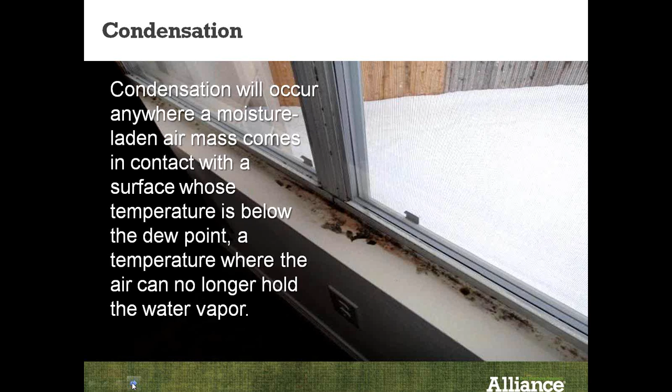The reason I put this up is we've seen the window industry change some of the performance criteria to having a condensation resistance index. So I'm wondering, should manufacturers of insulation materials create a condensation index for their insulation materials in wall assemblies? That may be a stretch, but it's something we should all be thinking about. So the focus of this presentation is to try to understand the facts of condensation. If we keep the temperature of these building materials above the dew point, condensation will not occur.

Obviously, the dew point temperature in the interior environment is very dependent on the environment that the occupants create in the home. If the occupants live in the home, and they're in the home throughout most of the day, they cook a lot. If the home is fairly new and there's building materials that are still drying out, well, the dew point in that home environment will be a lot higher, which means that the building material temperatures have to be a lot higher also. So that's a main fact that I sort of want to focus on.

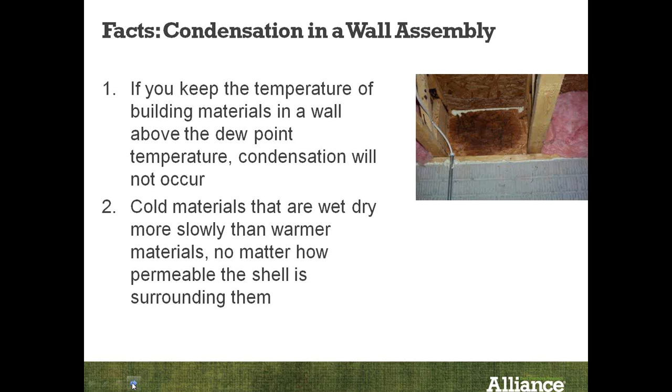But the other fact is cold materials, when they do get wet, they stay wet for a long period of time. And so an example I always like to use when I talk to builders is if you look at your driveway in the wintertime and you have a pool of water, a puddle, it takes a lot longer for that puddle to dry out because it's cold outside and the surface temperature of that driveway is cold. If you have that same amount of water and puddle in the summertime, it dries out fairly quickly. So sort of the same concept. And I'm trying to keep this as simple as possible, and that's our whole goal of this presentation here.

Third fact is when you have air movement in wall assemblies, air tends to bring a lot of water vapor into that wall assembly through diffusion or through holes. And fourth, when water vapor moves across assemblies or through environments, it's not really dependent on temperature, it's really dependent on concentration. So a mass of air that has high vapor is going to want to move to a lower concentration of air or surface. So those are the 4 key points that I want to make as facts in regards to condensation in wall assemblies.

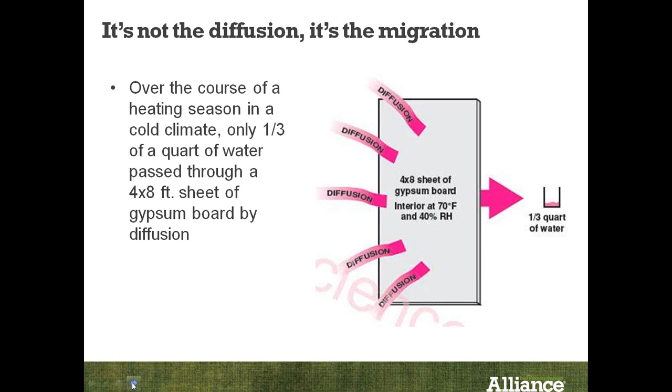But just to talk about diffusion, obviously I would say 99% of our walls are sheathed with gypsum wallboard. And gypsum wallboard is not a vapor barrier. It allows vapor to diffuse through the product. And you can see here, a third quart of water passes through a 4x8 sheet. This is fairly well known in the building science arena, but I'm just trying to let you know that water vapor does pass through building materials. Now, if we have a 6 mil polyethylene sheet, it's considered a vapor barrier, so we will not see a lot of vapor pass through those types of materials.

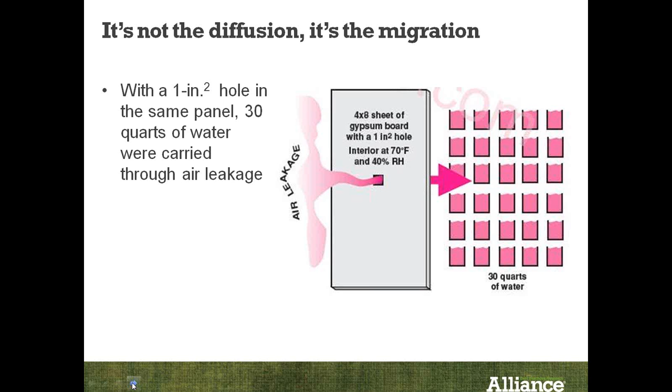But in a drywall sheathed wall, if there is a hole, and there are many holes like electrical outlets or plumbing penetrations, that hole and air leakage will bring a lot more water into that wall cavity. And in those cavities, it's more prone for condensation to occur because now the vapor that's passing through that hole is looking for a really cold surface to condense on. If it doesn't see a cold surface to condense on, it's not going to condense, basically.

So let's focus on temperature. Temperature, I think, is what architects, engineers, builders, building science need to strive to understand. I think that simple concept will ensure that building assemblies will be more durable. I think through the works of building scientists and others in the industry trying to help builders or architects and engineers understand performance of wall assemblies, we're starting to add other characteristics, like vapor diffusion through wall assemblies, looking at different building materials, looking at hygrothermal analysis models, and all that is great, but I think we need to try to understand temperature. If we look at some old building science books from the 50s and 60s, they really focused on temperature as trying to control the interior cavity environment.

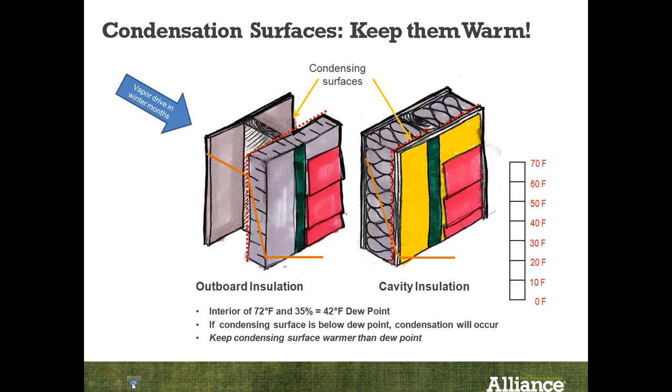When you have insulation that's within the cavity, now we have thermal bridging occurring, but we also have interior cavity temperatures that are lower than the dew point temperature in the home, which means if vapor or air leakage occurs behind the drywall, there are surface temperatures for condensation to occur. So keeping surfaces warm in the cavity is the key here.

So lastly, if I look at the last 70, 80 years, Owens Corning brought in their fiberglass batt in 1938, which is a vapor permeable product and a very good insulator. Some of the downfalls with vapor permeable insulation is it creates a bit more potential and risk when we talk about condensation in higher performing wall assemblies. Vapor permeable insulation allows air leakage to occur if there's no vapor barrier or air or vapor retarder behind the drywall, and allows for potentially cooling off condensing planes.

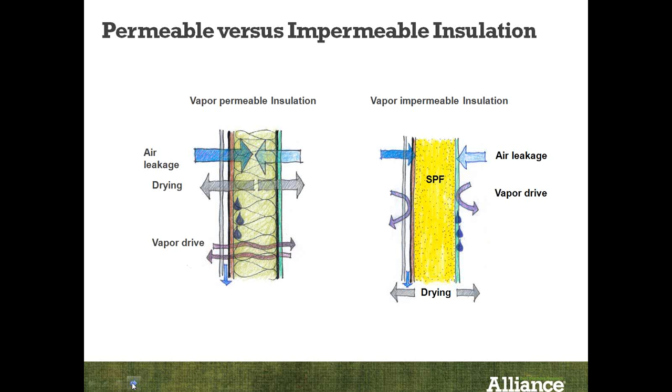It's a vapor control layer, it's predominantly an insulation thermal control layer, and it could be an air control layer. So it brings a lot of benefits and takes a lot of headaches out for builders, architects and engineers, because it is a complex wall assembly, and doing it right the first time makes a lot more sense.

So I just wanted to go through some pictures and projects that I've worked on over the last 15 years and show you some typical examples of what I've seen in the field. These examples are new homes that have been built, and these are basement scenarios. Condensation is more predominant in heating dominant climates, so climate zones 4, 5, 6, 7. This one is a concrete foundation wall, and we're seeing a lot of condensation, and in those corners we're actually seeing frost because it was so cold.

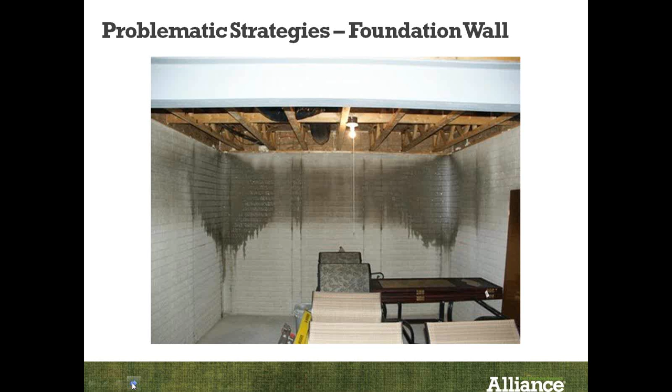This foundation was actually insulated outside, but only below grade. So the above-grade area, about 14, 15 inches, was exposed, and it caused condensation to occur. Why did it occur? The main reason is the interior surface temperature in those corners was below the dew point temperature in the home. The other aspect I want to talk about: in new construction, especially basements, we introduce a lot of moisture during the first 18 months of the home's life. Because concrete has a lot of water in it, it raises the interior relative humidity inside the basement and ultimately the whole house.

The other area we see a lot is insulation applied to band joist areas, where typically they're insulated, but we're allowing the moisture-laden air to get in contact with a cold surface. In the bottom left, we're seeing an OSB band area. That band area was insulated, but covered with fiberglass batts stuffed between these open web joists. It was meeting the R-value of that climate zone, but the fiberglass batt actually cooled off that OSB insulated band surface to below the dew point temperature. Fiberglass is not an impermeable insulation; it's vapor permeable, so it was still allowing vapor to diffuse through the batt and condense on that cold surface.

And on the top left is something very similar. The builder insulated the between floor system with a rigid board product. Same scenario here, he put an extra layer of batt insulation over top of it, but it was still condensing on the foam board layer because that batt was cooling that surface off, but still allowing moisture to diffuse through it and condense on it. Obviously, there's no drywall in these scenarios.

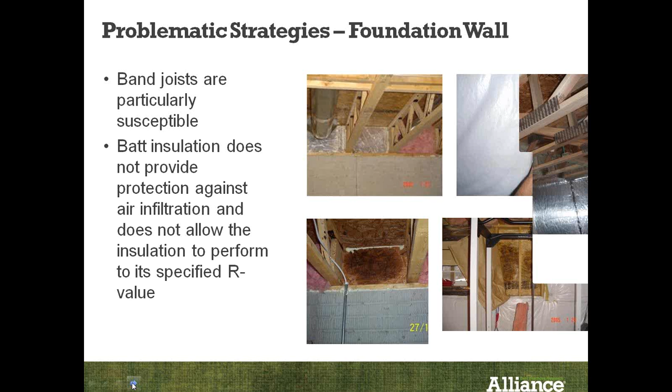And these are areas where the blanket has a vapor retarder on it, but they're not sealed very well. And these little gaps cause vapor to pass through leakage points and condense on cold sheathing surfaces. So what about spray foam or other rigid board products? These are best practices that we see. When we have impermeable insulations, we can address a lot of these surface temperature areas, and we can increase these surface temperature points by installing vapor impermeable insulation in these areas.

Now, these are all installed inside the home. They can be installed outside the home also. So I'm just showing you one scenario where insulation that's impermeable can be applied on the interior side, but also can be applied on the exterior side. And predominantly, exterior applied insulation is the best practice out there right now.

So what motivated IBACOS to create this tool that Marty's going to go into in a few seconds? Well, we've worked with WUFI. We have WUFI experts in-house at IBACOS. So I'm not saying that WUFI is a very poor tool. I'm saying WUFI is a very complex tool. And what we've seen over the last probably 2 or 3 years, we're seeing a lot more architects, engineers, HERS raters starting to be trained in WUFI.

And what we've noticed is when we get requests to review a WUFI model, we see variation across the board. And a wall assembly that, from the IBACOS perspective, looks not very good because we have a lot of experience, we're seeing these models coming out really good. And we're trying to understand why. And I think we can come down to the root cause of this: WUFI requires materials that have specific properties, and you have to define those specific properties in WUFI. And WUFI has a standard default library database.

But I know for a fact, every time I try to run a WUFI model for a specific wall assembly and for specific material that a manufacturer makes, it's very difficult to get all these different properties. And I just listed probably 1/3 of the properties that WUFI needs to know to do a proper model. And I know that there's a lot of people using WUFI that are not getting the right properties.

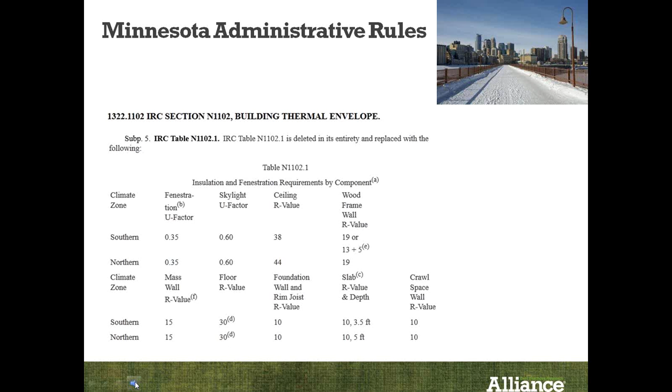So Minnesota, they have an adopted modified 2009 code. Here you can see in a wall frame we have 19 required R value or 13 plus 5 exterior. Next. So as we showed for the entries, in this particular case, you can see we've selected Minnesota as our location. It's identified as a Zone 6A. You can see this on the bottom left of the slide. It automatically identifies the average winter temperature of 16.7. An indoor room temperature we're going to model at 70, and an interior room relative humidity of 30% is the average.

So in this particular case, we've modeled the wall, and we're going to do the same wall scenarios throughout all 3 cities for ease of understanding. We have vinyl with hollow back, no rigid insulation, half-inch OSB, and a 2x6 wall. And it will vary, 2x6 or 2x4, depending on how big of a wall we need to achieve our required prescriptive R value. In this particular case, this model shows no spray foam. We have a fiberglass R21 batt and half-inch drywall.

So knowing that our average indoor room relative humidity is 30%, you can see we have a marker, black triangle with a line. It identifies that is our average indoor relative humidity, and we are in a risk. Basically, it's saying that we will have a condensation potential at any time when the indoor relative humidity is above 13%. And that you can see on the bottom right underneath the other red box where it says inadequate, maximum acceptable indoor relative humidity of 13%.

So now we choose to go to Colorado. We have an Energy Code 2009 IECC. In this case, we have a requirement of 20 or 13 plus 5. Next. So as before, we're going to start out with the same wall assemblies in the same scenario. In this case, we need to get an R20, so we install an R21 batt.

And in this particular case, our average indoor relative humidity is 35%, with an average winter temperature of 31.7. And in this model, our maximum acceptable indoor relative humidity is 24%. Next. As before, we'll run a scenario with board stock on the outside, again, 1 inch of polyiso.

And we've now reduced the framing to a 2x4 and installed an R13 batt. No sense in maintaining a 2x6 wall if no need to, and we can still achieve the R value by prescriptive measures. So in this case, we have a maximum acceptable indoor relative humidity of 42%. But again, is it always going to be 35% indoor relative humidity? We don't know. Next.

We run the same hybrid scenario here, 1 inch of spray foam and an R13 batt. And we now increase that acceptable indoor relative humidity to 48%. We've actually achieved now, we're 13% higher than the average, so not too bad. Next.

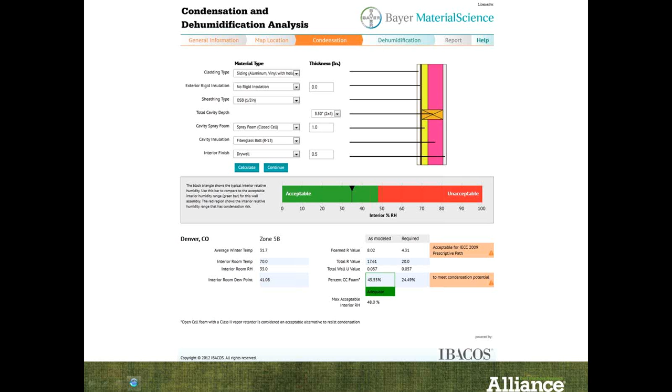Marty, there was a quick question here that says, but filling a 2x6 wall cavity with open cell foam in Minnesota does present condensation risk. Oh, I'm sorry, this is a comment. Because of the, it says OCSPF. Am I reading that? Open cell spray polyurethane foam. Thank you. It is not vapor impermeable. Is that correct? Feedback on that, guys? Sure, and you know, so we know that different open cell foams have different perm ratings.

In this particular case, our product, I believe, off the top of my head, is a 21-inch perm. So dividing that by 5.5, you're going to end up at... Oh, I guess I got to get my calculator out here, huh? Yeah, and in some of those cases in a climate zone like Minnesota, there may be different paints that we're putting on drywall to decrease the permeability of that wall assembly. But again, the key question here is warming up that interior condensing plane.

Sure, and then back to the perm. So at 5.5 inches, you have a perm of 3.8, not quite a class 2 vapor retarder. So as Anthony said, then you would consider putting a vapor retarder coating either directly over the insulation before drywall, or you could apply a vapor retarder coating over the drywall to prevent any vapor diffusion.

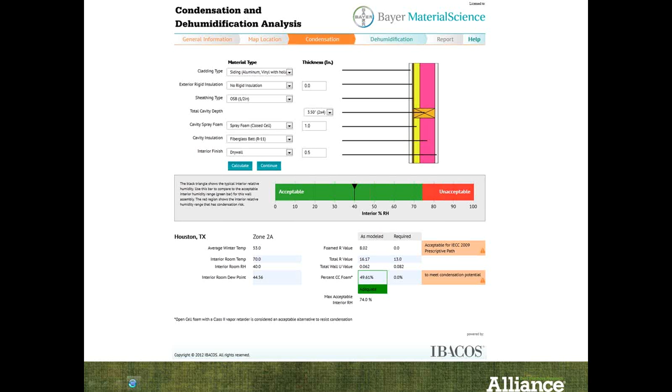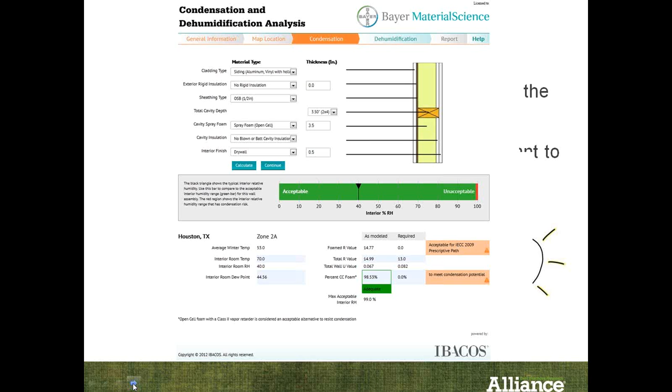The hybrid approach, another scenario with 1 inch of closed cell and R11 batt, and we've raised the maximum acceptable indoor relative humidity to 74%. Next, an open cell scenario and a 2x4 wall, reaching the R13 required value, we've now raised the acceptable indoor relative humidity to 99%. Next.

It's up to you guys. All right, Marty. It's yours, Anthony. Yep. Thanks for that analysis.

I think that was great, looking at the different scenarios and how different insulation materials can improve and enhance the durability of condensing planes, really, and condensation occurrences in different climate zones. But our next steps, this tool we created about 5 years ago, but over the past 2-3 years, we haven't done a whole lot to it. But we're at a point now where we think we can expand the comprehensiveness of the results that it spits out. We're looking at potentially doing a version 2, but obviously we need some support from the industry to do that.

Bayer right now has been licensing the tool, but there are some things we want to address. Right now, it's really a conductive dew point analysis tool, but we're thinking of adding some features to it, looking at almost an hourly analysis of condensation occurrences across a wall assembly. So give it a little bit more features, but don't want to make it as complex as other modeling tools in the industry today. And we're looking for feedback from you guys and gals on what you would like the tool to do when talking about wall assemblies and condensation occurrence.